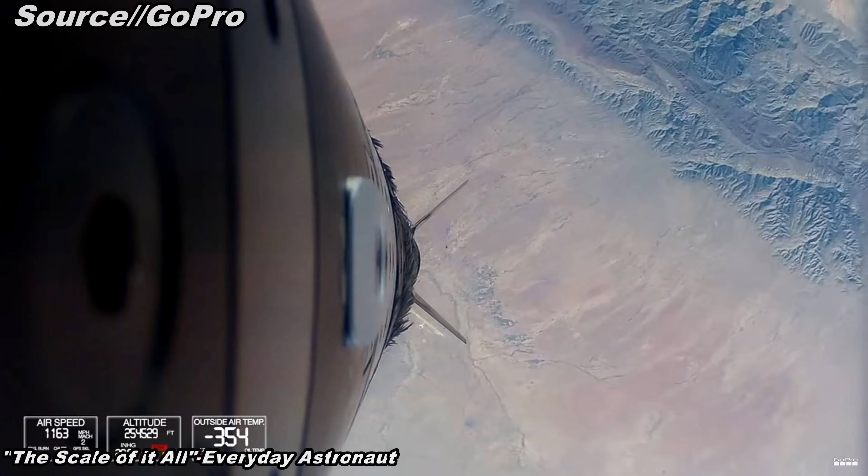I want to do a space shot, a rocket that goes over 100 kilometers and then comes back. I do not currently have the capability to build this vehicle, so we need to build a bunch of rockets between now and whenever that space shot happens to sort of build me to that point.

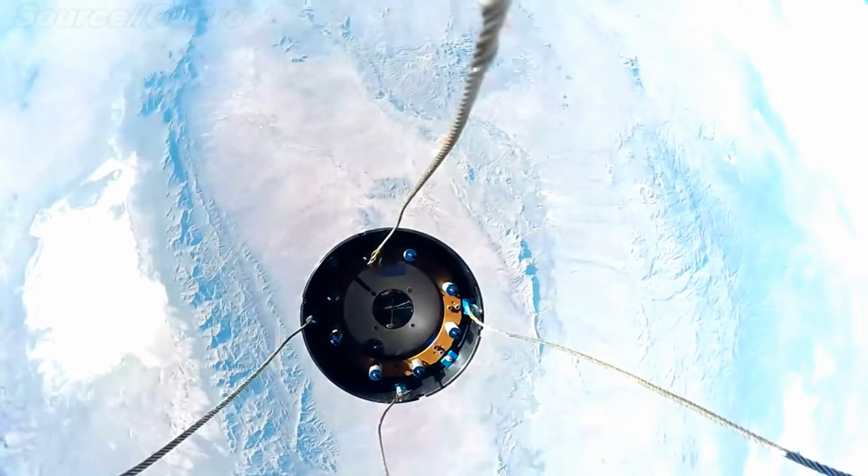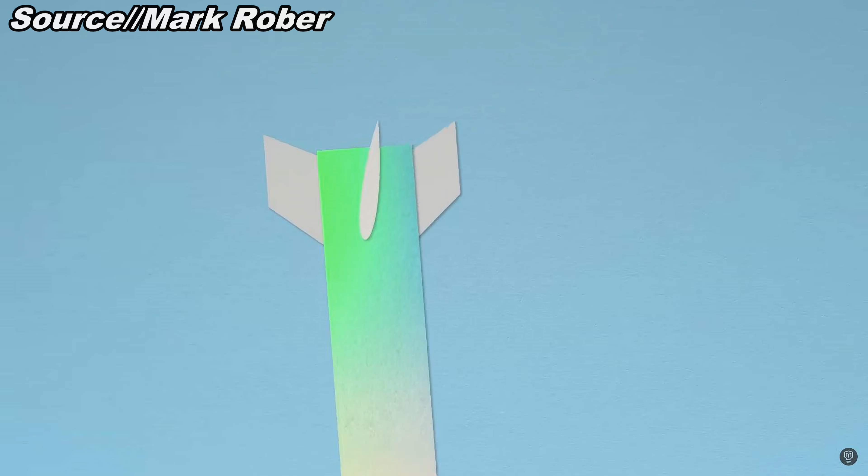Some of you may have seen that about a year ago, Joe Barnard and Mark Rober did a video about the world's highest egg drop. If not, I will link Mark's video in the description below. But I want to beat their record. I have not built the vehicle for this yet, and it won't fly until mid or late 2025.

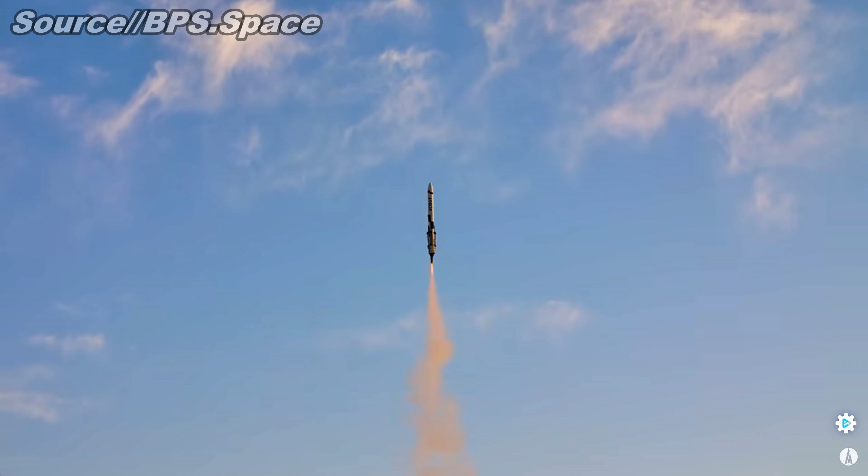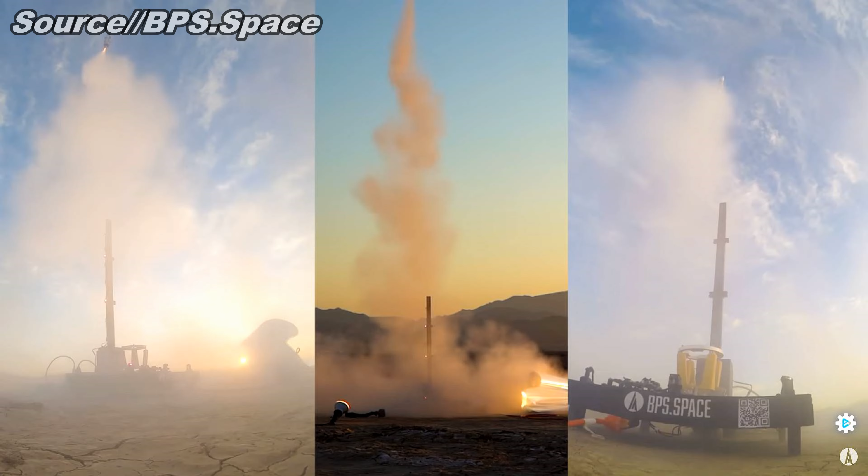But the upper stage will not have fins, and it instead will use TVC, or thrust vector control, to stay stable and perform some very crazy maneuvers, definitely not associated with a very famous and powerful vehicle that the FAA hates.

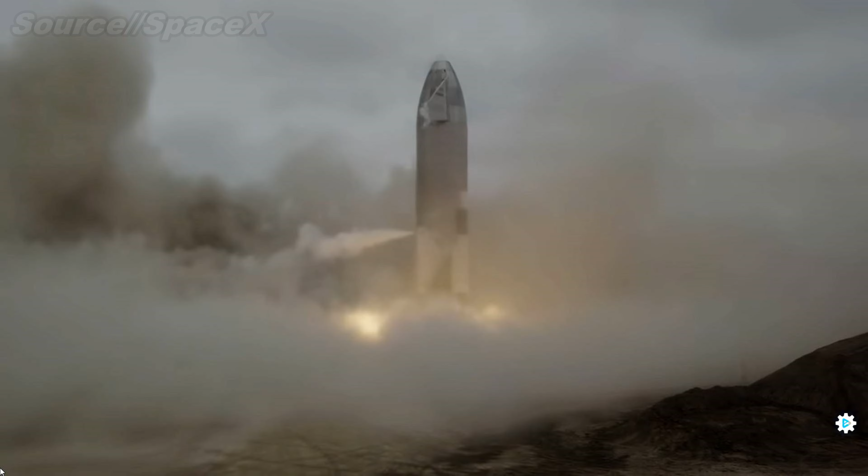But anyway, let's take a look at the CAD for the vehicle. Okay guys, I have the vehicle modeled up in Onshape here, and we're just gonna take a quick look at the vehicle here. So the vehicle is about a foot and a half tall and is 54 millimeters in diameter, or 2 inches. And most of it is 3D printed in PLA. Everything that you're seeing right now is 3D printed.

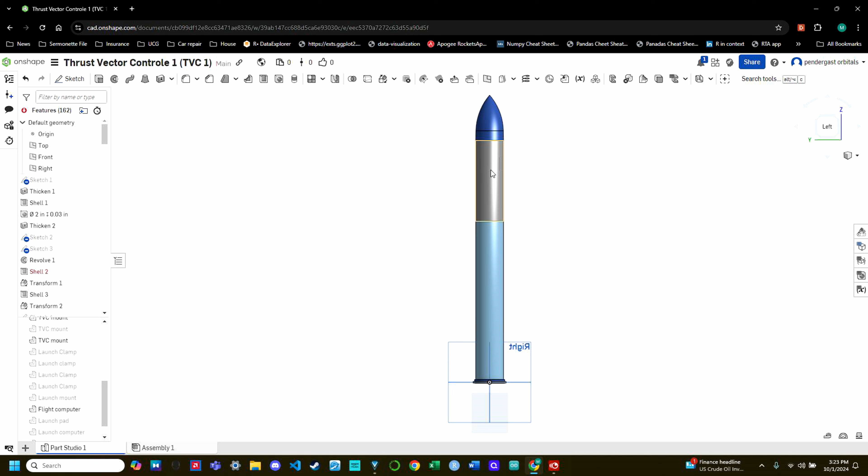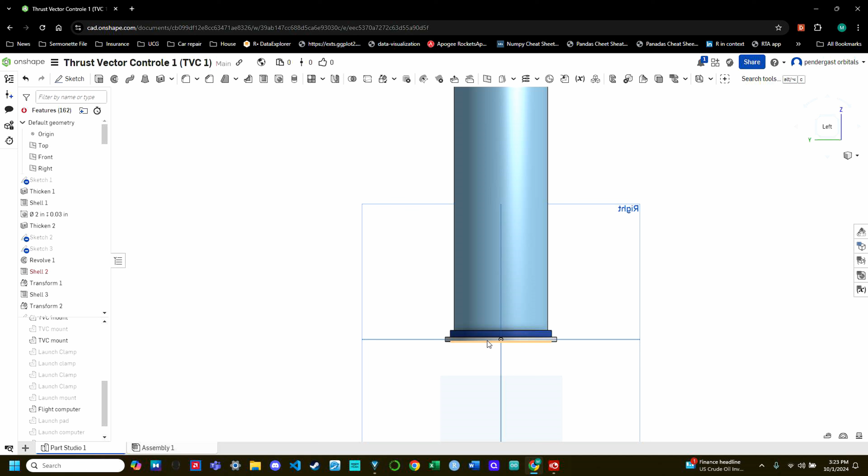So the nose cone is hollow. It is 0.1 inches in thickness. And then the avionics bay and booster section are about 1 millimeter in thickness, and then down here we have the launch pad adapter, which allows the launch clamps to grip the vehicle.

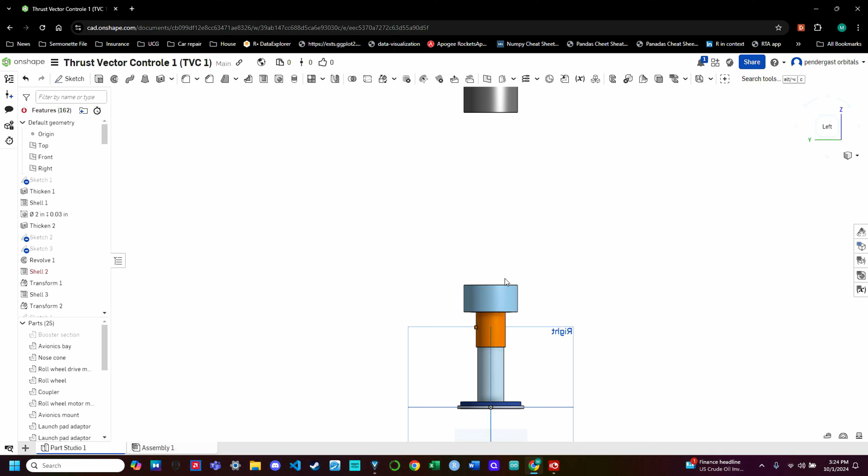So if I get rid of the booster section, down here we can see this. I have everything on the vehicle turned on right now. And as you can see, there are no fins. So this thing shouldn't be able to fly. But this is what allows it to fly. This is the TVC mount, or thrust vector control mount. So it works by moving the engine to change the vector, or the direction of the thrust, to maintain control on the vehicle.

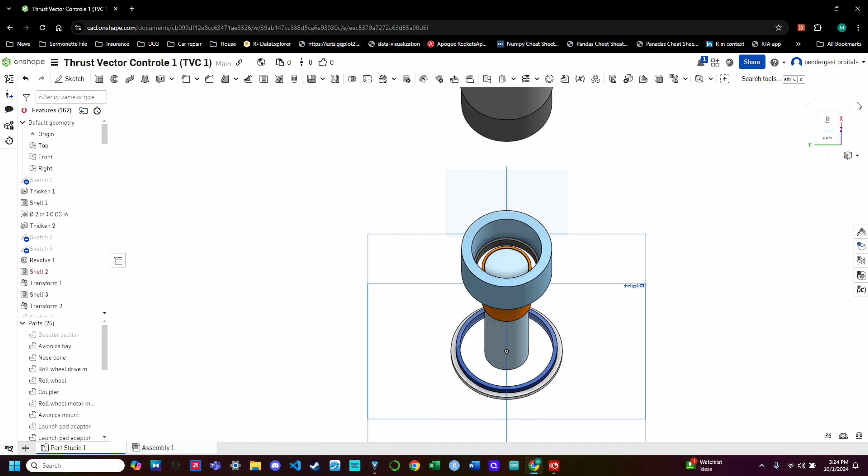And it's got 3 layers, or 4. The innermost layer is the mount of the engine. There's one right here, which is the yaw layer, and then this is the pitch layer, and then this is the mount. And then down here, we got the launch pad adapter, so I'm going to turn that off. And then I'll turn the booster section back on.

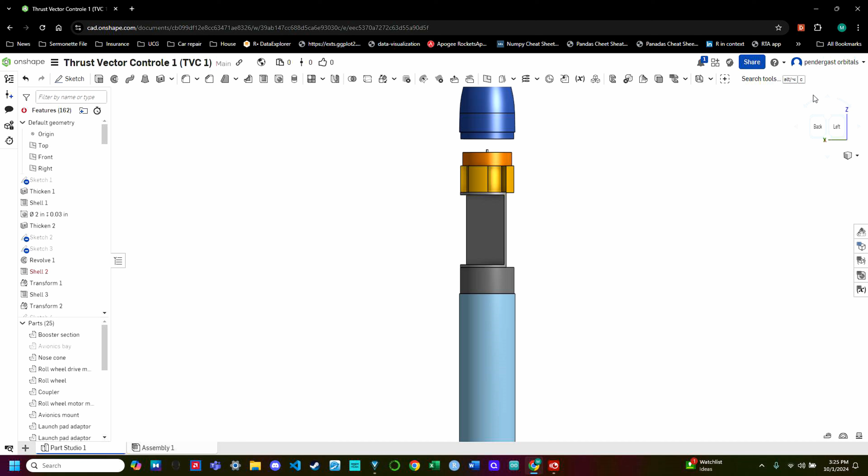And then if we come up here to the avionics bay, and I turn the avionics bay off, you can see that we got a few things here. So this is the computer sled, so it holds our flight computer. So this is the flight computer, and then back here we'll have a LiPo, or lithium polymer battery.

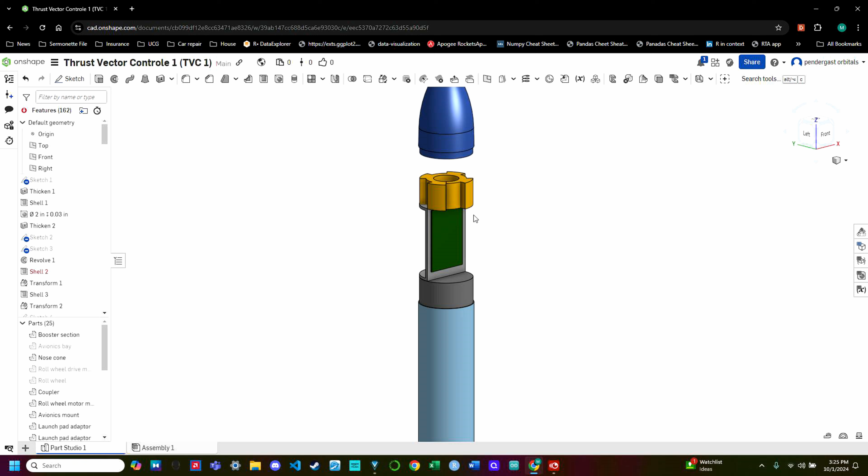And then up here we have a roll wheel, which, if I turn that off, I guess it's technically called a reaction wheel. This is the motor that drives it. We have the mount for it right there. I'll turn it back on. And up here we have nothing inside the nose cone. Actually, I don't have it modeled here, but we'll probably have the telemetry antenna in there.

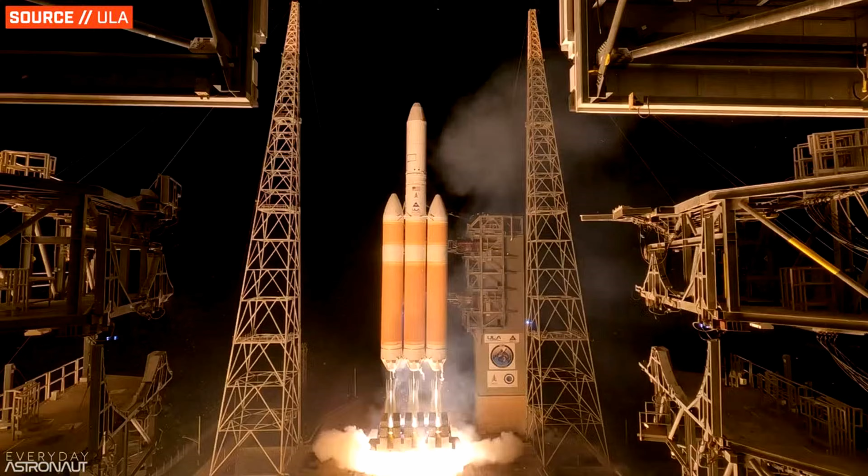Okay guys, so this video wasn't super in-depth, but do not worry, we will be doing a video for everything to do with TVC1, including recovery testing, full stack testing, the airframe of the vehicle, the TVC gimbal, the launch pad, launch 1 prep, and avionics, and so much more.